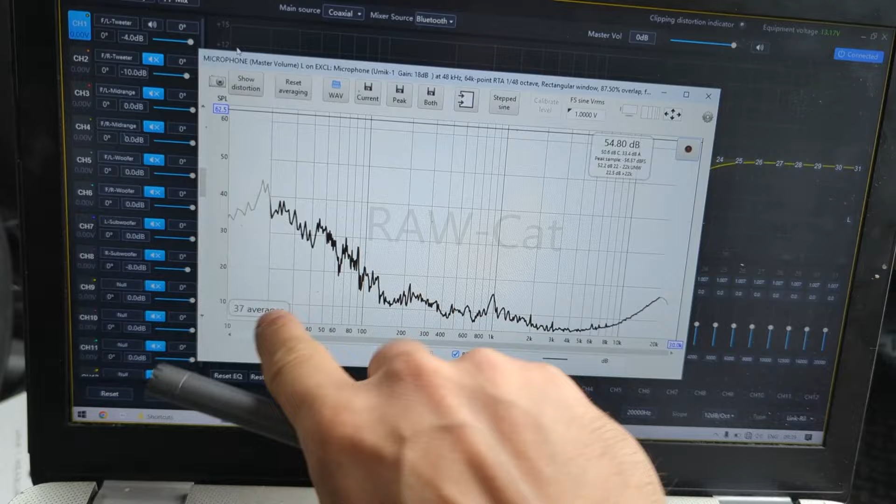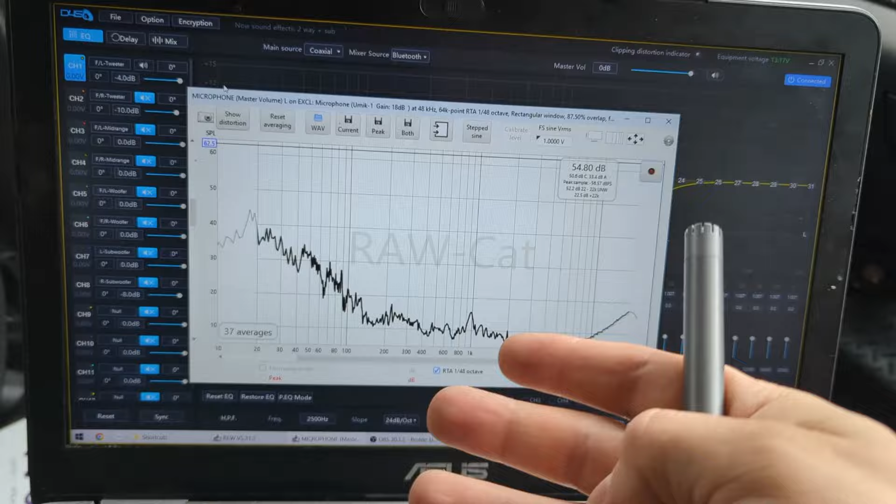Now what we're going to do is jump into REW, this same window. This is probably the trickiest part: you need to play the pink noise, enable the measurement, start waving the microphone around, and take about 50 to 100 averages. The average number depends on when the response stops changing, because when you put the microphone on one ear, then the other, you will see the response changes slightly, but after some amount of averages, it evens out and doesn't change anymore. At that point, when it doesn't change, you want to stop the measurement because taking more averages is pointless. In most cases, for mid-ranges and tweeters, it's going to be maybe 60, 70 averages. I always recommend going about 100 averages. For mid-bass and subwoofers, you need a bit less, but 70, 80 averages is a very good amount.

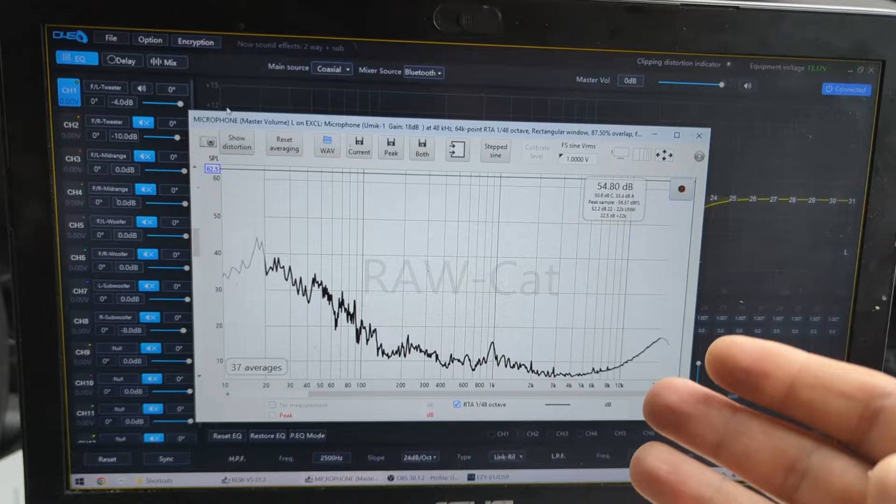So let me demonstrate how to do one measurement. I have my file ready, I have REW ready, and I have my microphone ready. I'm playing pink noise, I'm waving the microphone, and I'm going to click start measurement in REW. And I just stopped it - I stopped the measurement and I stopped the pink noise. Now, I did notice that after about 50 averages or so, the response didn't change. So this is done. We need to save the measurement, so we're going to click on current here and save it. This is one measurement taken.

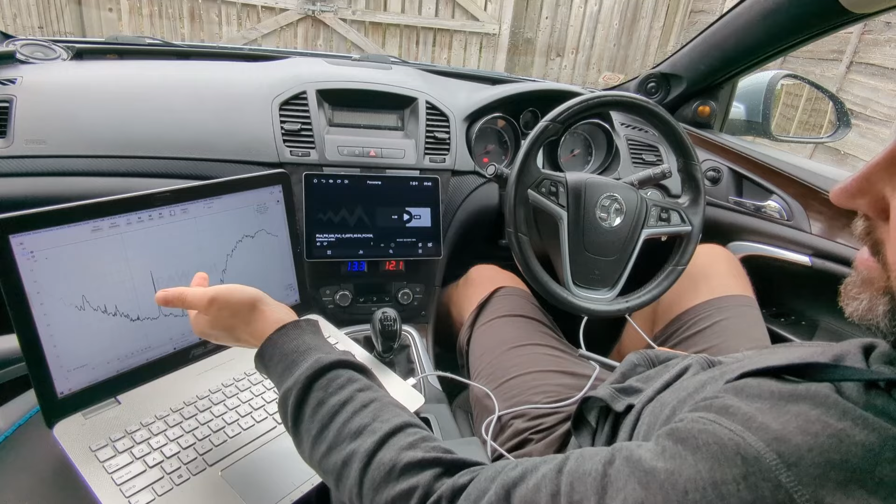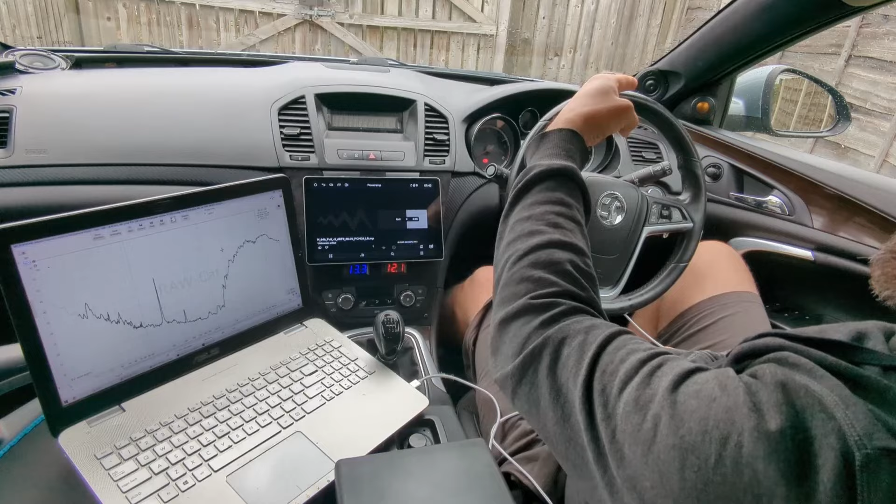Now, if we want to take another one, I'm going to open the DSP software. I'm going to mute this tweeter that I was measuring, and unmute this tweeter on the other side. Go back to REW, and we're going to do exactly the same again. I'm going to put this one on. Now the pink noise is playing through that side, and I'm going to do exactly the same. Stop, and save current measurement.

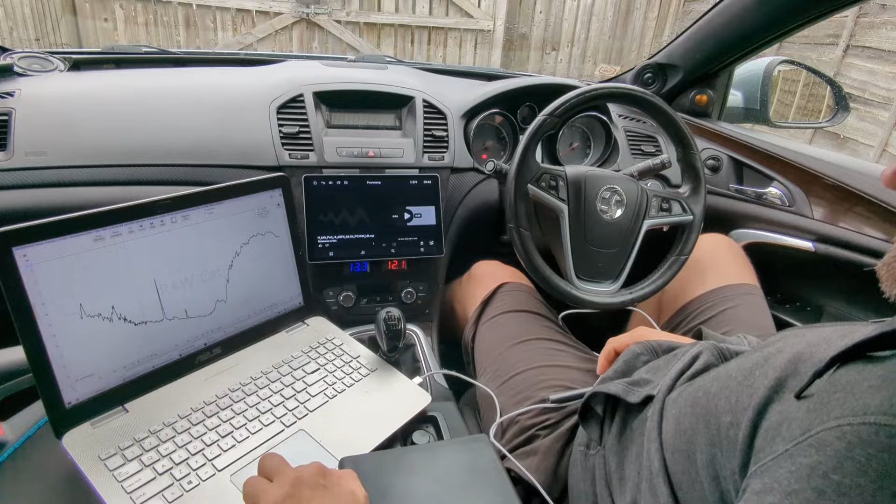And that's it. So just for you to see a bit better, I'm going to do exactly the same just with the inbuilt screen. So you saw how it looks from outside, now how it looks inside. As I mentioned, in the DSP software, I have enabled this tweeter. Then I'm going to go to REW and play pink noise, move the microphone, and press start in REW. Then I stop the measurement in REW because you can see nothing changes. I'm gonna stop the pink noise because it's annoying.

And this is the measurement that you have. You have to click this one, the current save button. If I click on it, the measurement is transferred to the main REW window. Now I'm gonna close this window and find REW, which is here.

If I go to the all SPL tab right here, here I have all my measurements. On the left side, you need to name them. So the first one that I did, left tweeter. And then these other three are the right tweeter that I did one after the other. I'm just going to delete this one because it's exactly the same. So this is the green and the orange is the same tweeter - it's just measured slightly differently because while doing the first one, I showed it with my phone in the very back.

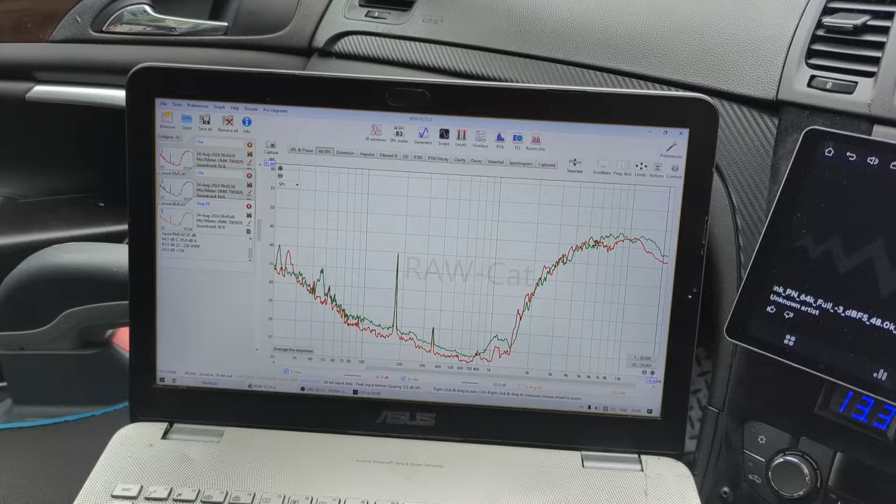But basically what we have, I'm just gonna put right tweeter like that, and I'm gonna disable this, enable that, and we have my left and right tweeter responses. Now in this video, I would like to focus only on the moving microphone method and how to take the actual measurements, not the responses, how to read them and everything.

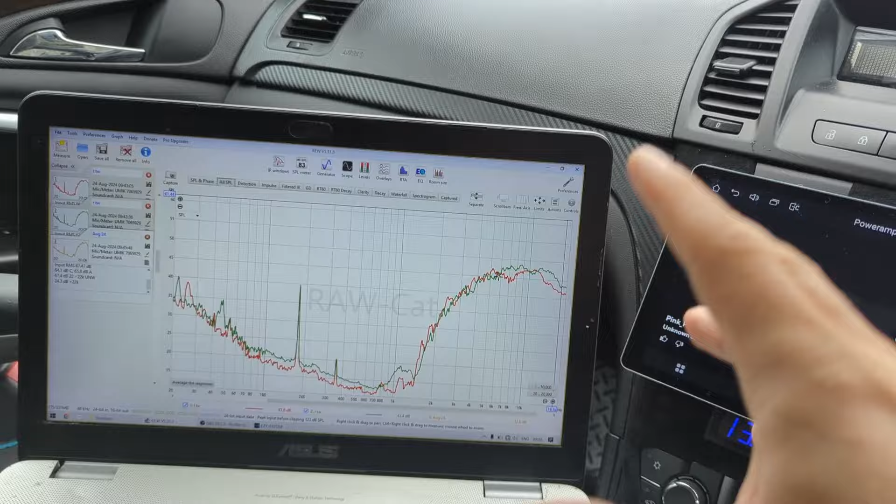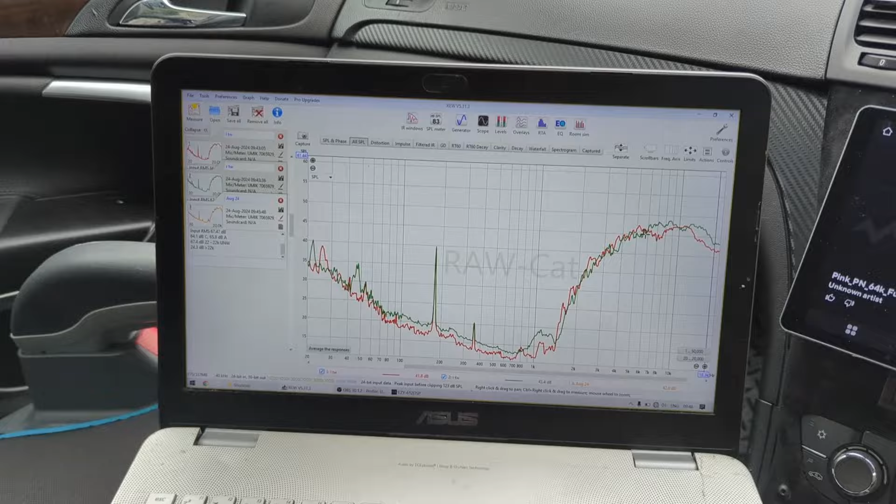We will touch this in the next video when I'm going to take the measurements in exactly the same way as I showed you. I'm going to take the measurements of this tweeter, that mid bass, the other side as well, and the subwoofer. And then we're going to analyze in depth the two-way system that I have. And in the next video, I'm going to show you how those measurements look and basically what they mean and how to read these graphs. But in this one, I just wanted to focus on the actual measurement taking technique.

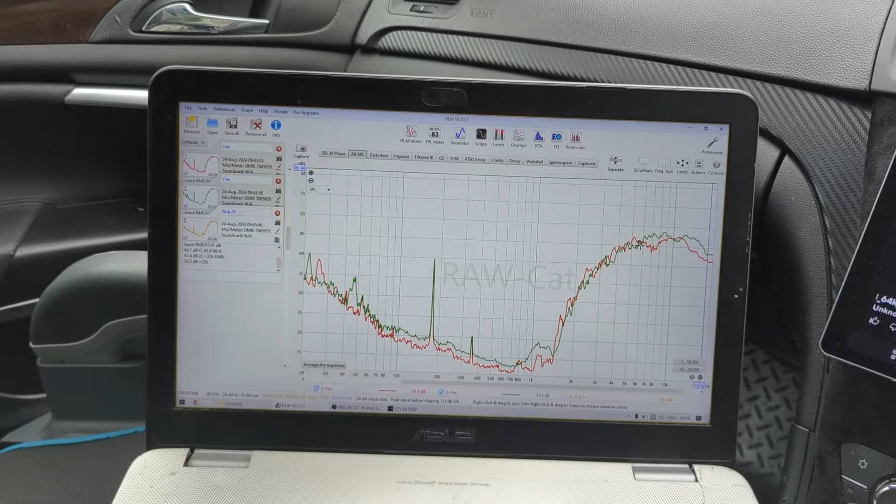So as I mentioned, you need a USB microphone. It can be any other microphone. You need pink noise, you need REW, and you need to do spatial averaging while moving the microphone around your listening position, which is around your ears. It is a bit fluffing around when you have to enable this, disable that, click that button, click that one, at the same time move the microphone and everything. You need to kind of get used to managing different things at the same time.

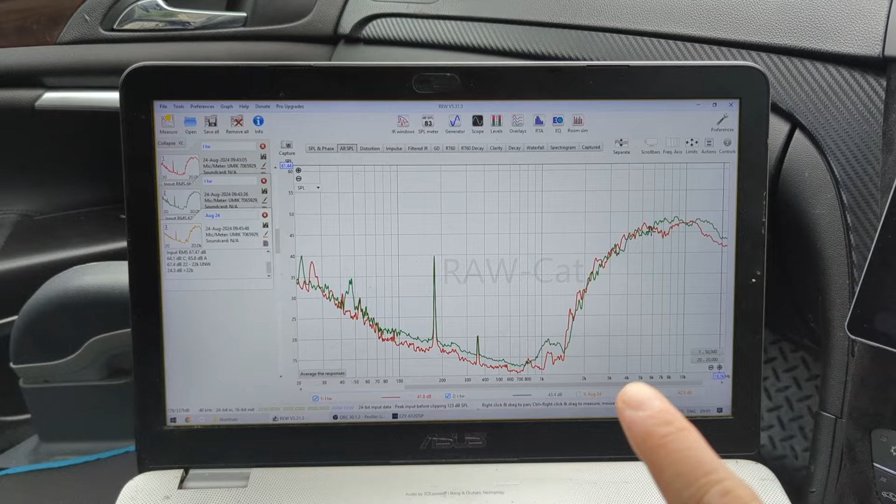So this is why I'm not jumping into the measurement straight away. I'm going to give you some time, again, some homework. Try to measure and see what results you're having. The main thing to remember is to have the calibration file, to set the settings correctly in REW, go back into the video and watch those settings I showed you. And another measurement without the drivers is very useful to do, because a lot of people are always asking, at what volume, at what level do I need to take these measurements?

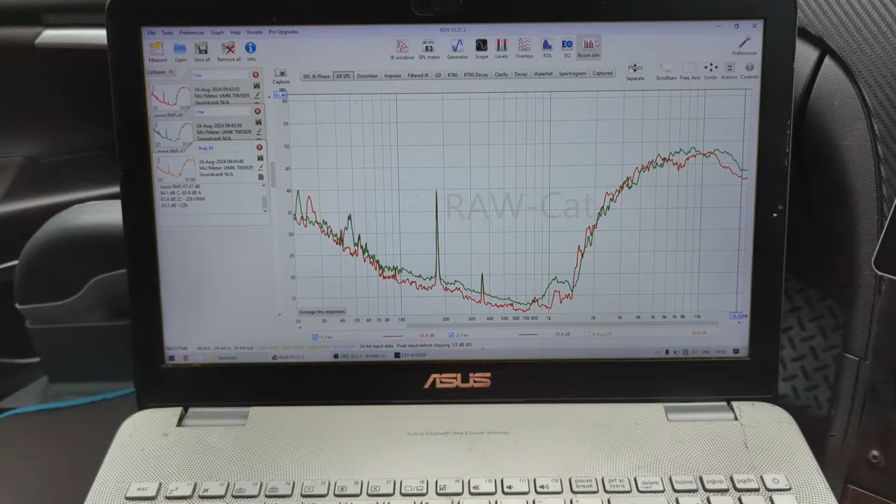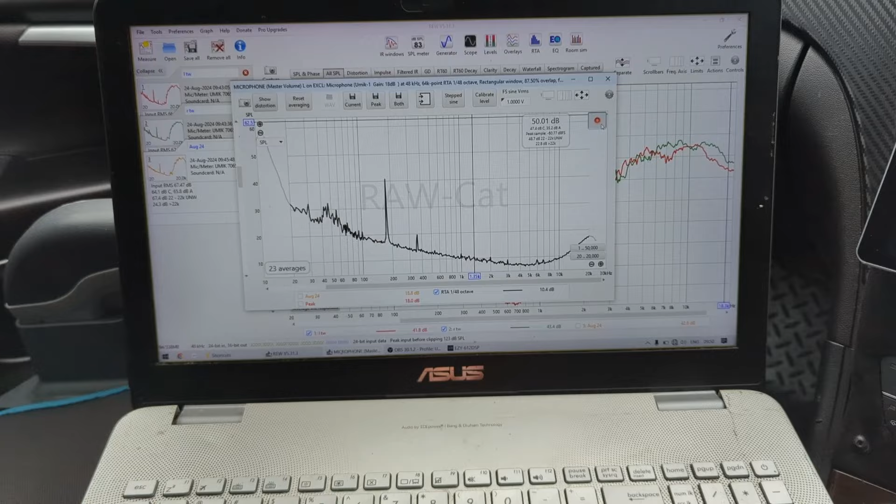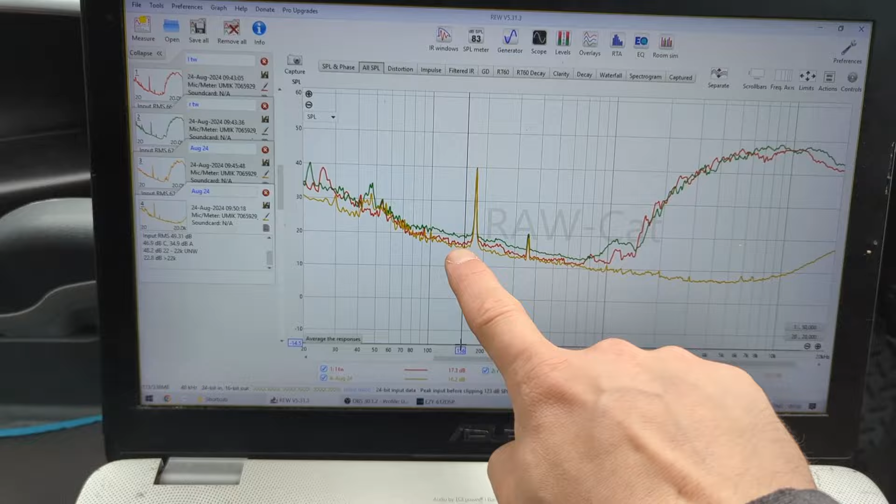So now, while I'm doing this, I'm going to put the microphone like that. I'm going to go to RTA. I'm going to take one measurement without talking. There we go. I stopped it and I'm going to click on current. So it's going to save the measurement to the main one. And there we go. So zoom out a little bit. This yellow line is my noise of the actual microphone and my environment.

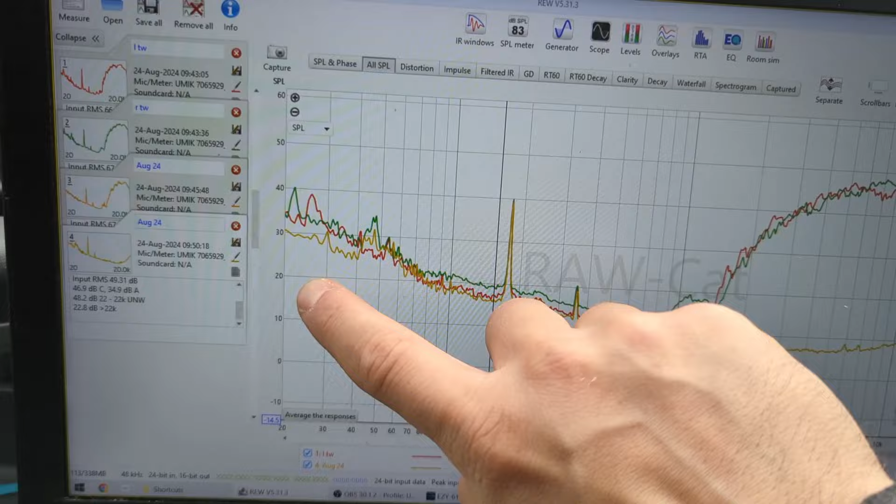So what I want when I'm taking measurements, first take the measurement with nothing playing, just hold the microphone and don't talk, nothing. Then you have this noise. And what you want is to make sure that whatever measurement you're taking, it would be at least 25 to 30 decibels, which is these grids, above the noise. So in this case, we can see one grid is 10 decibels. So we have 10, 20, 30 decibels above the noise, which is perfect.

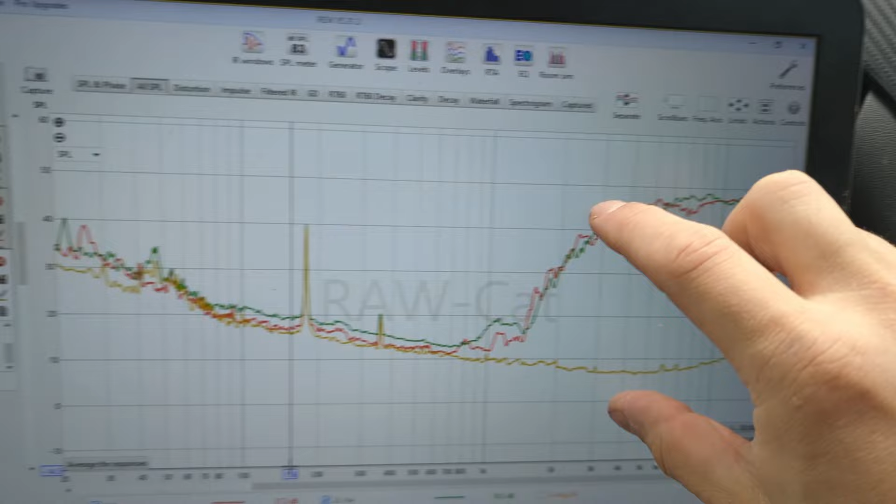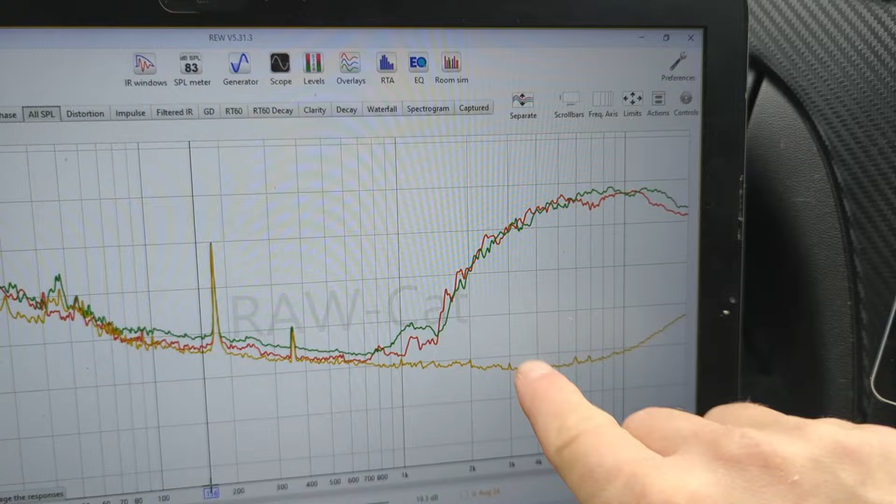For the mid-bass and subwoofers, I would need to crank it up a bit. So I need the measurements to be somewhere around the 50 decibel line, all the other measurements. Because what we want is to see the measurement and we want to see the crossover slope wherever it goes. Because if you have your noise somewhere here, you're not going to be able to see what's happening down there. So if we want to make good slopes, we want to see everything, we need the measurement level to be very high.

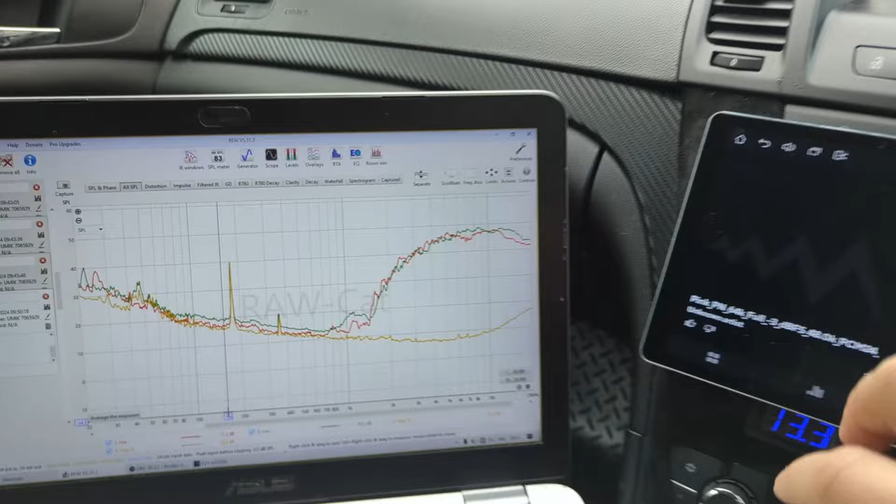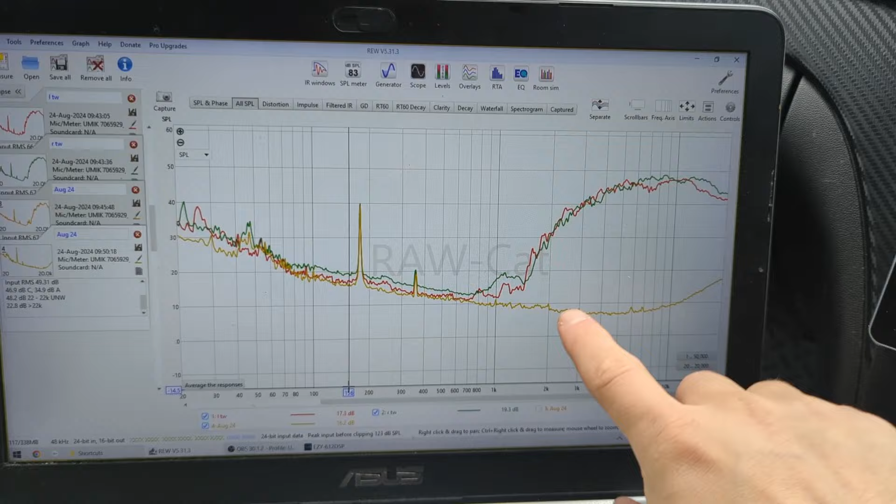Now, it doesn't have to be super, super loud because you're going to blow your eardrums and you're going to potentially damage the speakers. There's no point in doing that. Just make sure that your measurements are going to be way above the noise of the microphone. We're going to talk about this. Don't worry about this. I'm going to cover this in the next video. But for now, it's just how to take the measurements using the moving mic method. So I want to keep it nice and short.

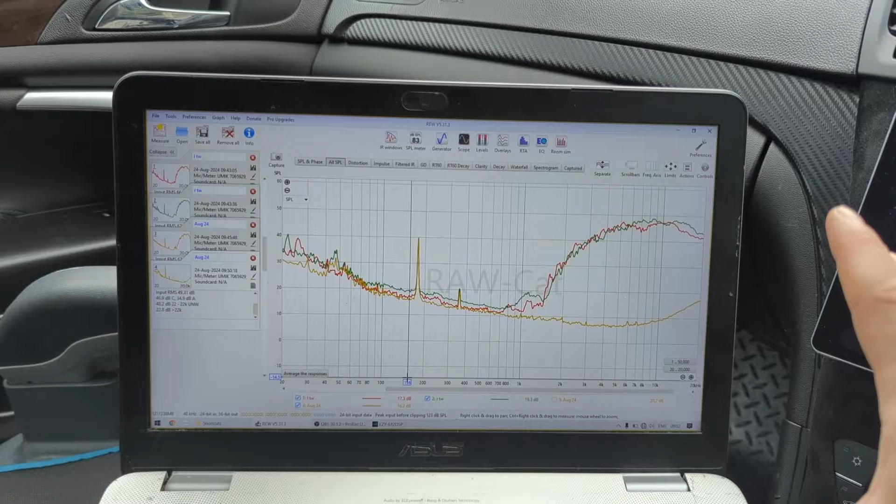This is it. Do these measurements, save the REW file, and in the next video, we're going to analyze the frequency response of all the drivers.